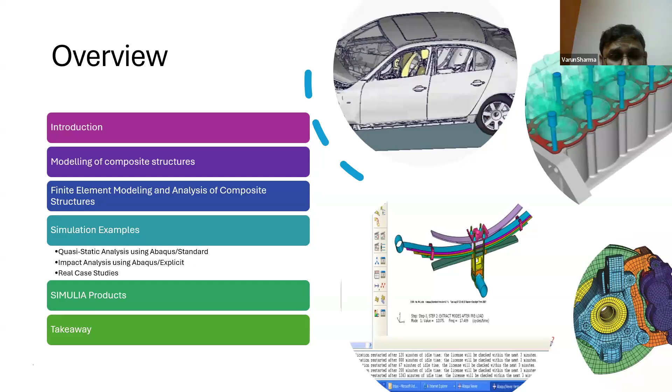So the agenda which I have created is a very unified and centric agenda. We'll talk a little bit about composites - maybe not in depth like Professor Debashish explained, but the fundamentals of composites - and then we'll progress to finite element modeling, and then talk about some examples. Finally, in the last slides, we'll talk about the products, because I know there will be a lot of questions about competency, and you can take some positive aspects from the slides.

So, first of all, as most of the members already know about composite material, let me try to explain in a very simple, short way. Composite is basically an essential kind of material nowadays, and it is a combination of two or more distinct materials that work together to provide properties that a single material cannot achieve on its own.

So if I talk about the basic level, every composite basically has two components: one is the matrix and another is the reinforcement. The matrix is the primary continuous phase which holds together the molecules, and it also transfers the loads between the components, and protects your structures from environmental damages.

And if we talk about the reinforcement, which is the other main component and is embedded inside the matrix - if you ask me what is the main purpose of reinforcement, I can tell you it provides the strength and stiffness. How you design your reinforcement and tailor your mechanical behavior depends on the reinforcements.

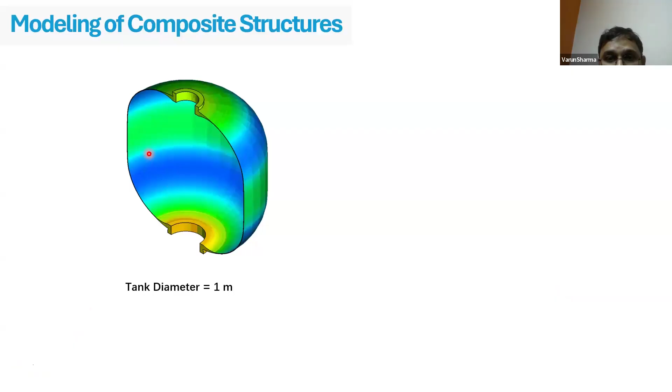So the first picture in this slide is about the scale - how you can choose the geometry at a different scale. We have a tank which has a diameter of 1 meter, a very large composite tank. If you see, we are not concerned with the individual fiber in this particular diagram. Instead, we treat this material as a continuous structure, and it looks at a global response like deformation, stress distribution, or failure locations.

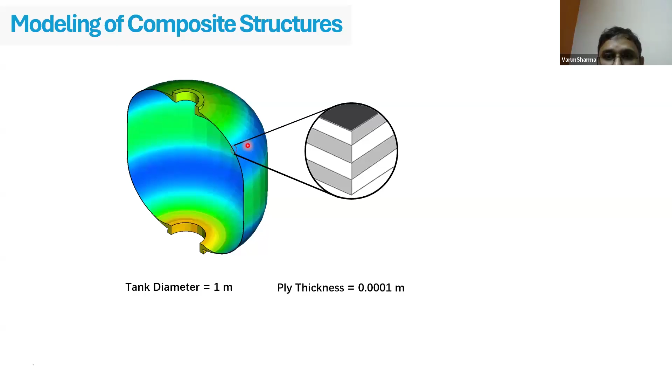So this is what we call macroscopic modeling. Let me choose the scale. Now if we zoom in one level, this is the second one. If I zoom in, you can see we have this ply level, and the laminate is represented as stacked layers, each with a specific orientation and thickness.

And the ply thickness shown here is very small compared to the full structure. At this scale, we can start to capture how different layers are interacting and how stresses transfer between them. This scale is often called mixed scale or mesoscale modeling.

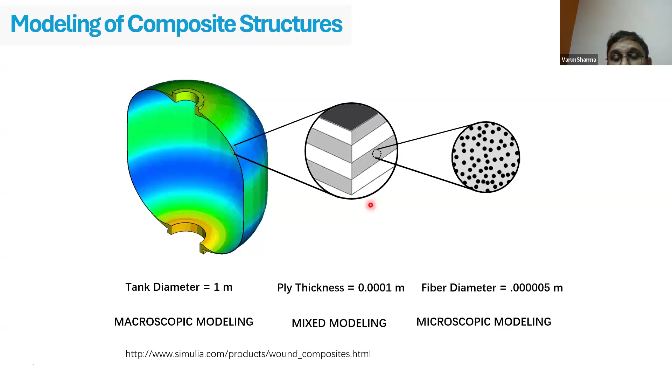So the key message from this particular slide is that composite analysis is multi-scale. If you wanted to understand the full orientation, you can feel free to choose the scale. Now let me explain elaboratively how you can choose it and which scale can help you.

So let's say we have these three techniques - now it is clear: micro, macro, and mixed. If you talk about the micro scale, as you can see, I try to put only the concrete words. In micro scale, we have the matrix and the reinforcements which are modeled separately, as deformable materials, and we explicitly represent fiber and matrix geometry.

Now, this is a very accurate study if you wanted to conduct crack initiation, debonding, as well as fiber breakage analysis. It can be computationally expensive considering the nodes, elements, and all those things. But this is the best way where you can understand the full structure in the form of small representative volume elements.

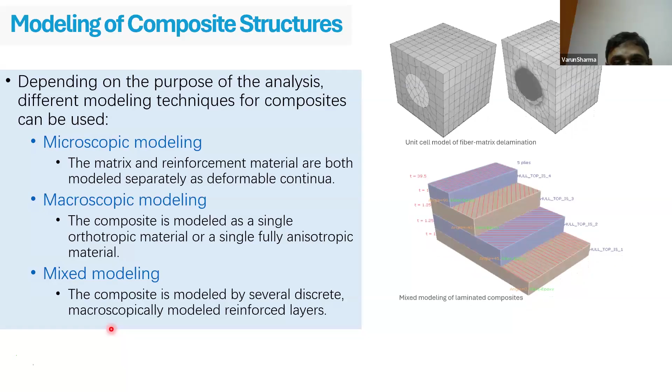This approach balances accuracy and can also help predict interlaminar stresses. On my right hand side, I've created some 3D models in ABAQUS package. We have this unit cell created with a very simple approach, and this is a mixed modeling approach where you can define different orientations and reinforced layers.

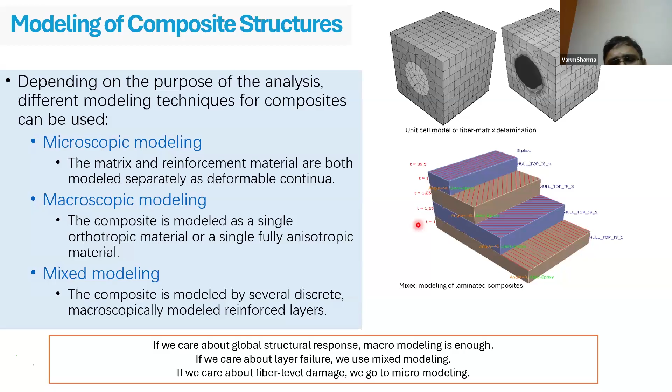The overall choice of modeling depends on your objective, your accuracy needs, and your computational resources. If you care about the structural response globally, macro modeling is sufficient. If you just care about layer failures, you can use mixed modeling. And if you care about fiber level damage, you can go to micro modeling. These are some of the ifs and buts we always prefer while performing simulation in ABAQUS.

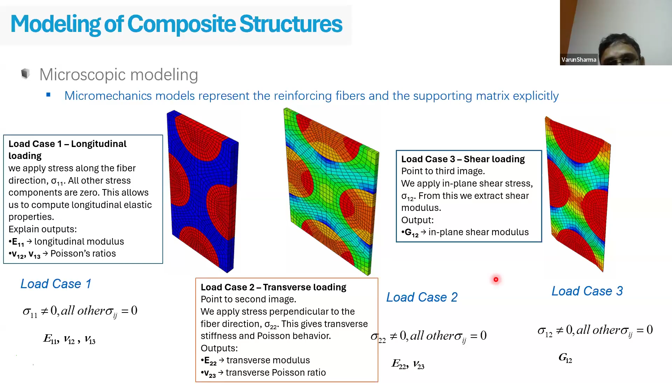Sometimes we imagine or have a longer vision to make something bigger. Of course you can do that, but in the back of the mind we also have to stick with the basics, because considering or projecting bigger achievements sometimes causes us to neglect the basics. So always stick with the basics, which help us execute the bigger task. So that was the basics, the fundamentals.

Now I would like to present some practical case studies we've done for customers. In ABAQUS, we have a very simple, specialized, sophisticated module. You can simply follow that module step by step and complete your composite modeling. This is the chronological order, as you can see from my screen. From part till load, we have the pre-processing module, job is your solver window, and visualization is your post-processing window.

First you create your geometry in ABAQUS, then you mesh it, then define the elastic or plastic properties, then assemble it, define the physics—whether static or dynamic—and interactions, and finally the loading conditions. You submit your job and visualize the results. That's the hierarchy.

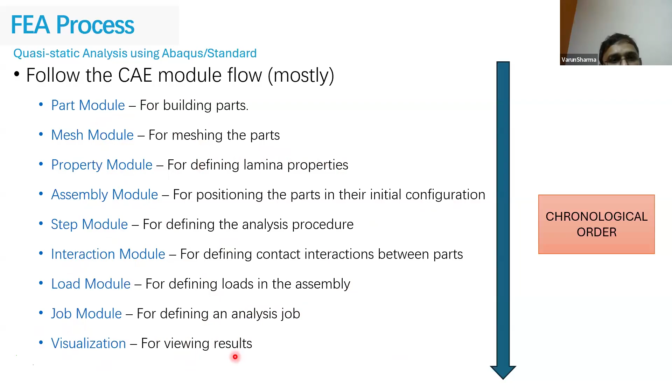So what we did, we created the geometry in CATIA. Of course you can do it in ABAQUS as well, but we prefer CATIA because it's from the same principal company, Dassault Systems. CATIA and ABAQUS both use the same kernel, so the background algorithms are easy to integrate with each other. We created the part here and imported it into ABAQUS as a step file, then built up the layup using CAE and composite modeler.

It's a specialized plugin available in the ABAQUS environment. Once we completed the import and export, we defined the properties and did the meshing. This picture reflects the contour stresses—blue, green, yellow. Blue reflects less stress concentration, whereas red represents high stress. The plus sign reflects tension and minus reflects compression. That's how the color differentiates the stress values.

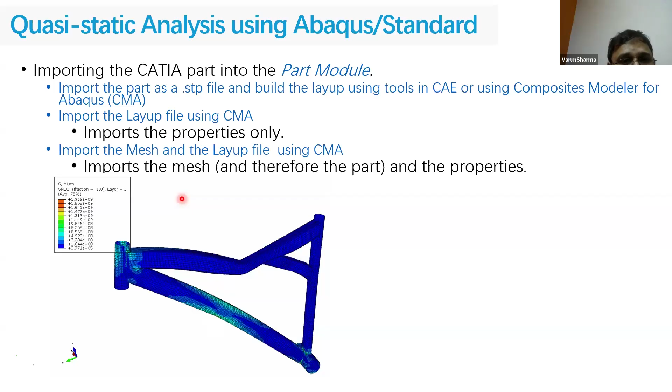So now, if you ask me how I have considered the problems, what exactly this is. This is just the frame, resolved under quasi-static analysis using the ABAQUS standard algorithm, and we define certain boundary conditions here. This is the fixed part, and again this is the fixed part, and we are interacting this rigid surface with the composite frame.

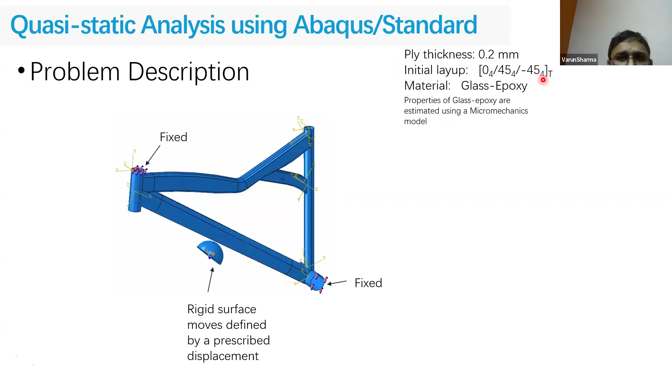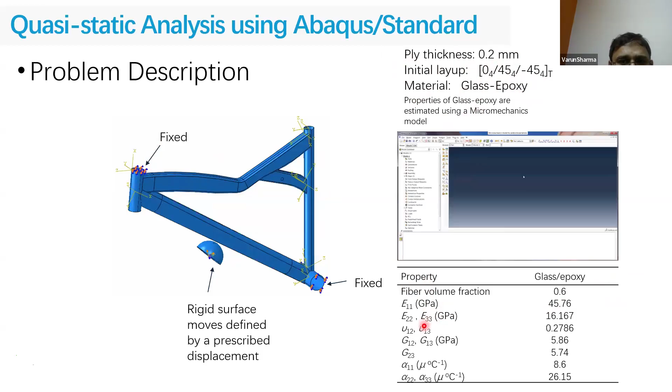We have used these properties: ply thickness 0.2, layup values, and material glass epoxy. So these are the elastic properties for glass and epoxy, which I have taken from certain research papers.

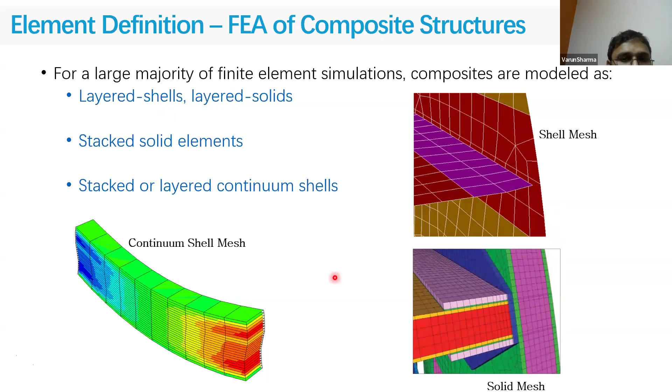Talking about the elements, what element definitions we can define. We have a list of categories: layered shell, solid, stack, and layer continuum shells. Considering the capabilities, you can choose solid and shell. We have also used 3D deformable continuum elements, so we have a list of libraries.

After we have done the analysis, these are the contour pictures, and on top you can see von Mises stresses, and this one is penetrating actually. So that was under quasi-static analysis, and beneath we have done the same analysis using dynamic impact using ABAQUS explicit.

So ABAQUS standard and explicit are two different solvers. Solver means which actually solves your partial differential equations, which calculates the stiffness matrix, which solves the large partial differential equations based on Lagrangian or Eulerian equations. So standard is more specifically designed for static kind of analysis.

And if you are into highly dynamic analysis, for example a car interacting with a wall, or something falling under the effect of gravity, those are highly dynamic explicit analyses. So here we are using certain wave propagation mechanisms, and in ABAQUS standard we don't use any mechanism. It's simply F equals KU, where F is your force, K is the stiffness matrix, and U is the displacement. That equation is also being used here, and depending upon your physics, you can choose the solvers. We have both this facility in ABAQUS.

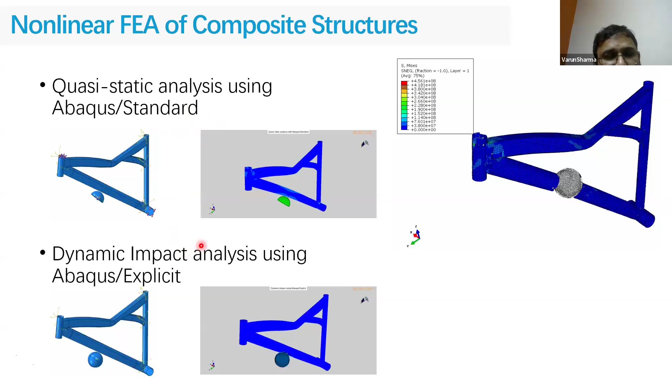Now that was basically a little bit about how you can model under static and dynamic conditions. Nowadays we also work more specifically on FRC. You might have heard this terminology very explicitly, and let me tell you, this is not an easy task to conduct. So we'll try to explain it in a very simplified manner if you are doing PhD, postdocs, or maybe R&D, so how you can simulate that kind of composites.

These slides try to capture all the information in a very confined way. Let's say you need to model FRC. How does this FRC work, and how progressively this kind of simulation fails? For example, let's say your composite is actually going to fail. Unlike metals, composites don't fail suddenly in one step, they basically fail progressively, step by step.

When they fail progressively, it means the damage starts small, in small increments, and then it grows layer by layer, and eventually leads to full failure. So that's how this mechanism works.

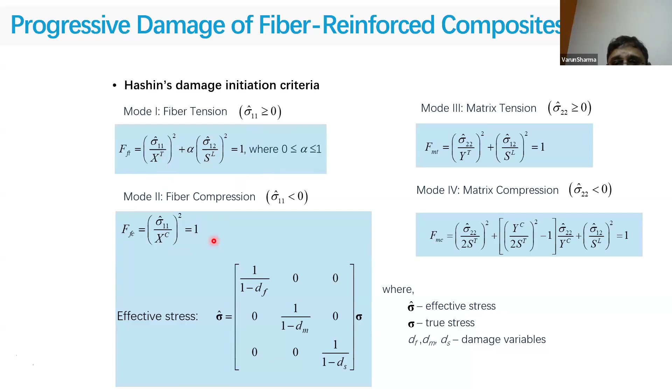It's just to give an idea how it works. So let me directly jump to this interface section. We have the edit material part. Here you can see you have to go to mechanical.

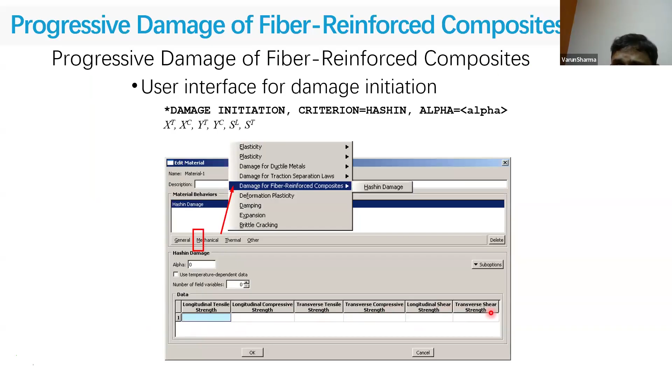You just click here and go to this damage for FRC, and select Hashin damage, and here you can define these values: longitudinal strength tension, compression, transverse tension, compression, and then longitudinal shear and transverse shear. So it's the same thing which we discussed here in FRC.

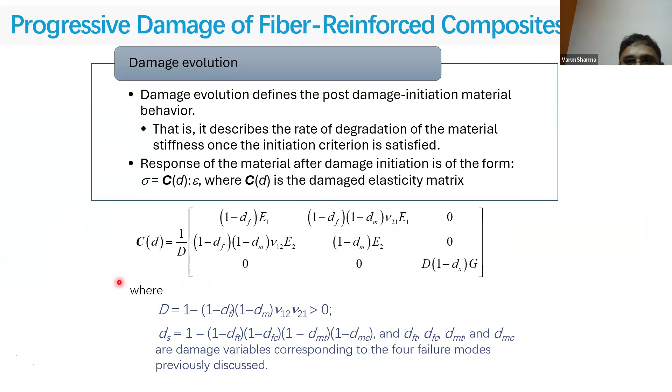Now for damage evolution, we are using these equations. These are all your damage variables corresponding to your failure modes for matrix tension and matrix fiber compression. So if you are planning to write your own codes, you can use these equations to help derive post damage-initiation material behavior.

So the second case, let's say if you wanted to introduce damage evolution, we have this functionality as well. You have to go to this particular part, select linear, and here again you will have four different parts, and you can derive the equations and apply the values here.

And we have very specialized keywords: DAMAGEFT, DAMAGEFC, similarly MT, MC, or SHR. So don't get confused, it's something very similar to your chemistry names, just to give you a quick idea.

So if you are doing keywords or scripting, you can also use these keywords within the ABAQUS environment. But just to tell you, these are very straightforward names, and you can feed the values here.

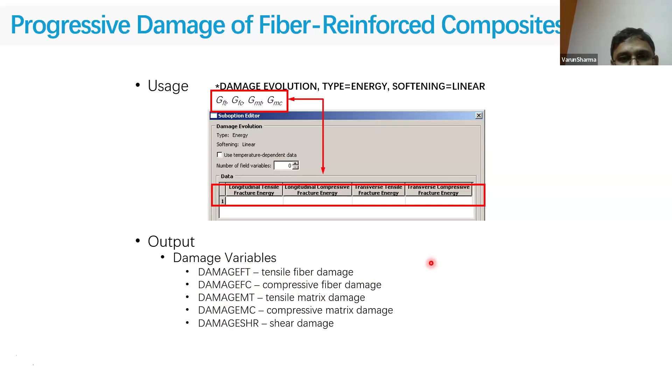Different solvers, how it works. If your target is only the maximum degradation in your composites, you can choose ABAQUS standard. It is actually removing the elements, but not eventually creating the failure.

But if you are using explicit, where you can assume a certain failure level, under the same theory, failure fiber modes, these are some of the conditions we use while performing the analysis.

Actually, these are keywords: section control, element deletion, yes or no, maximum degradation, DMAX. So these are the keywords which we are implementing while creating the finite element models.

And similarly, in your status file, which is your output file, we have two instructions, 1 and 0. 1 means some of the elements are active. If it is reflecting 0, it means it is completely removed.

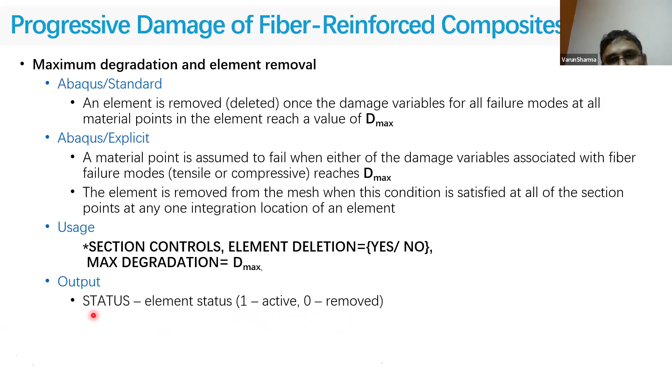So that's how we distinguish between the standard and the explicit solver. Now, based on our experience, we can tell you nowadays it's not that easy to simulate composites behavior. Generic analysis you can do, there is no problem, but nowadays the physics is getting more and more complex considering the new developments.

So experimental things cannot identify the elastic properties. So we need to find certain techniques such as virtual environments or AI or ML integration based softwares which can predict the behavior accurately.

So I can tell you we have this tool ABAQUS, which can help you to predict delaminations, material damage, failure, and it is being used extensively across the globe over a very large period of time because of its accuracy. This can not only help you to understand the properties, but also you can implement on a very large scale if you are a startup company or working in R&D sector. So a lot of things can be revealed using the ABAQUS tool.

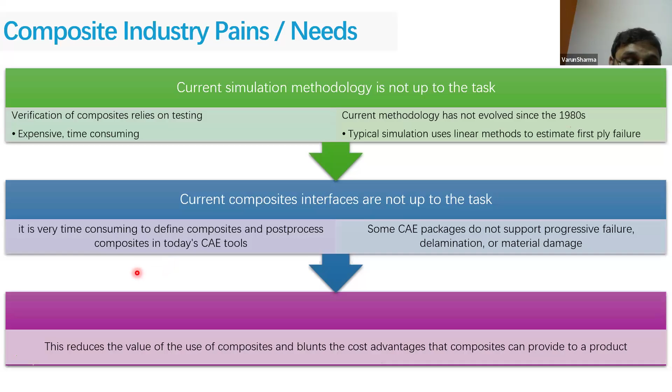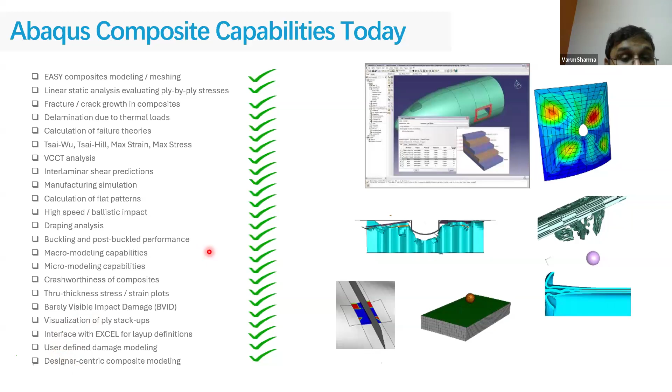Now I just wanted to highlight some of the portfolio extensions, because we have very large industries who are continuously developing the tool day in day out. So these are some of the tools you can see, like VCCT, or direct links to CATIA VPI, or composites crush. We also capture some of the industries, basically merging some of the small scale industries who have done a lot of work in the composites sector.

For example, WCM, it's a plugin developed by a French startup company. Now it is a part of ABAQUS. So we are always expanding our horizons in the composites sector, not just pre-processing, but always looking for something which we can include in the composites area. And for example, I would like to showcase some of the case studies here.

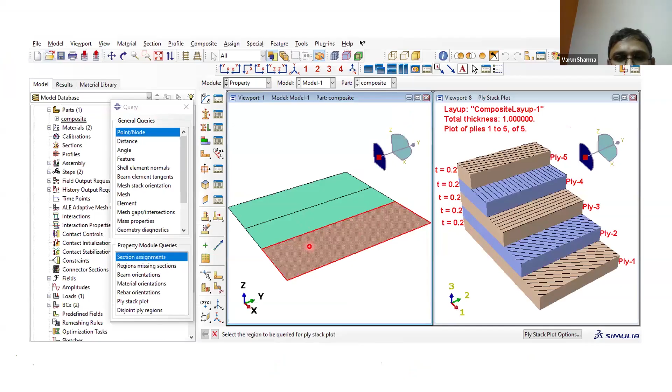So now if we see here, yeah, this one. So we have captured a lot of practical case studies here, which are purely for composites.

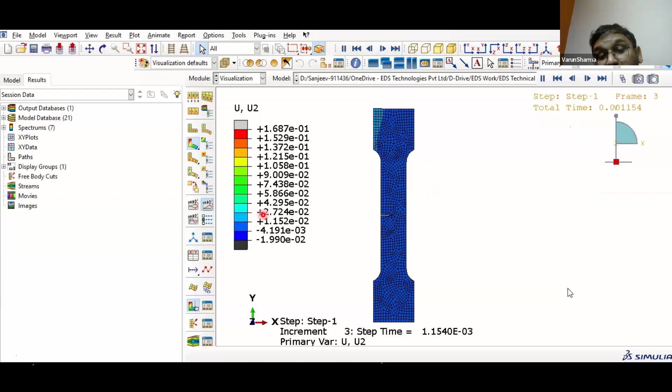So this is one of the case studies we have conducted under tension. Here you can see the displacements. U2 means displacement in the y direction.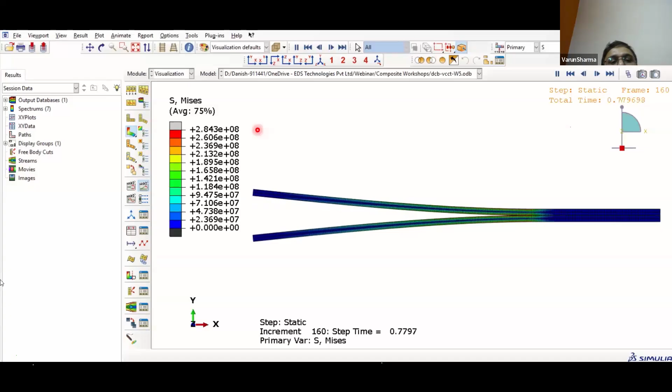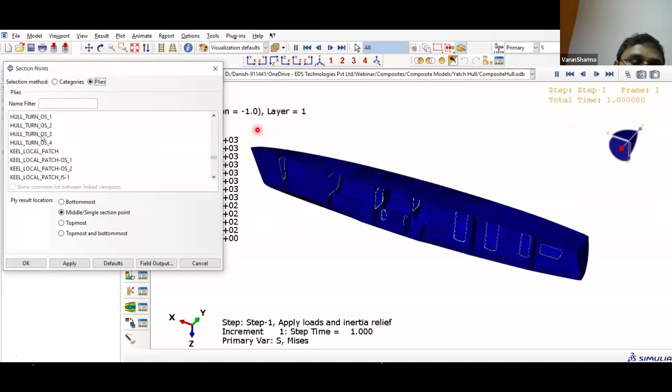This is another case study, VCCT, virtual crack closure technique. That was another example of yacht. And we have applied here loads and inertia. So we have incorporated various plies here, as you can see.

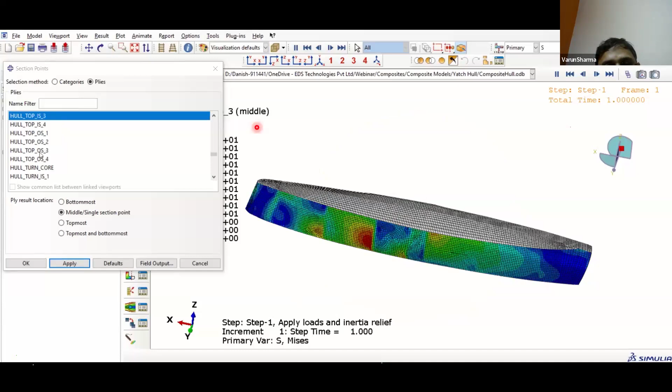Okay, so that's how you can see the specific stress value on individual plies.

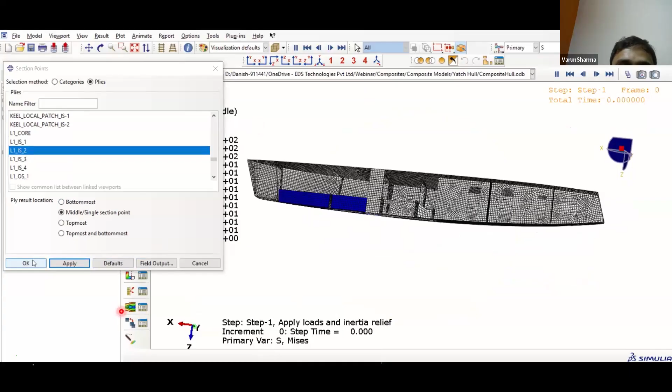And this one is the ball penetrating through the wall. We have used here the explicit solver because of the high velocity.

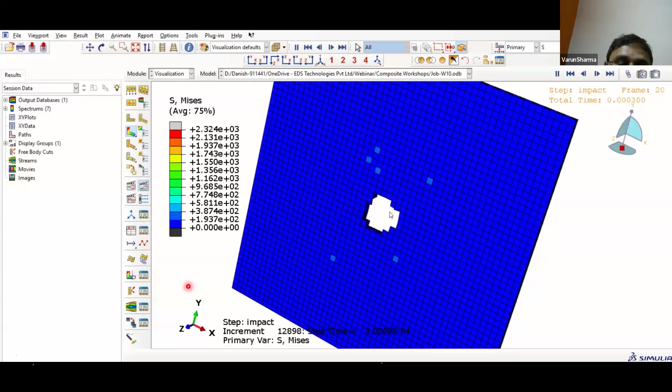The post processing part can simplify in many ways. So this was the direct pictures we have taken, animation videos. Again, this is a windmill example.

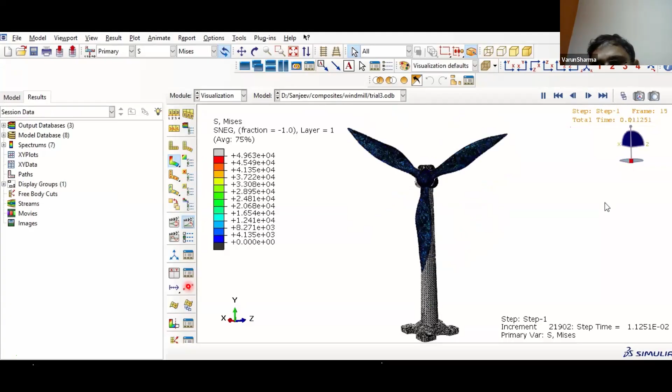The blades are made from composite material, and we can increase the speed as well. So we have more than 2000 customers, and we are supporting them day in and day out.

Again, this is a drone example. We have used here damage mechanics.

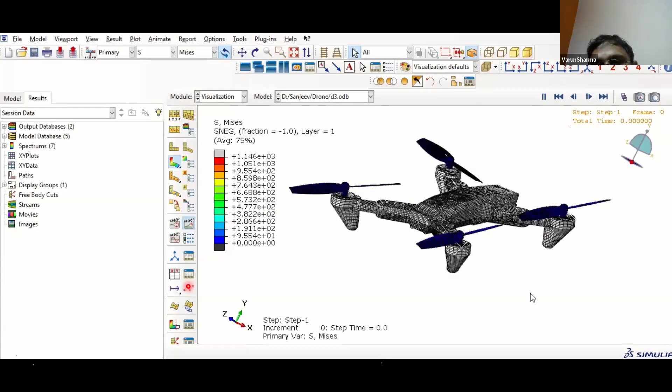Now I hope you get an idea, this is not just a solver, it does include a lot of capabilities. Now I want to talk a little bit about the suite, because this is the package portfolio we have used during the simulation. So you already might have heard of ABAQUS, which is for finite element analysis, but we also have Isight, Tosca, and fe-safe. Isight and Tosca are for parametric and non-parametric optimization, and fe-safe is purely for fatigue calculations.

So if you combine all these four software together, you can...

Hello sir, yes. Varun sir, is there any problem sir? Can you hear us? Sir, your video has stopped and you are not visible too. Your audio has stopped too. Can you connect with us?

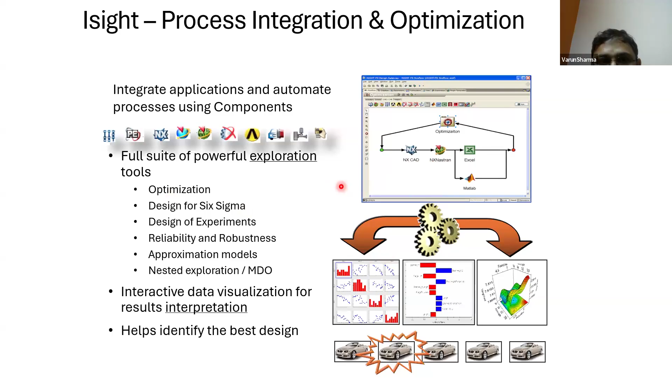For example, if you see here, we have created a complete list of applications which can be linked here. It works like drag and drop. It is not like where you have to create a 3D model - 3D parts you can do in ABAQUS, but here it is for linking the plugin. So just create your file, bring it here, and perform the experiments. This is a very industry adopted tool, so I would request you to just give it a try and you will see the benefits of it.

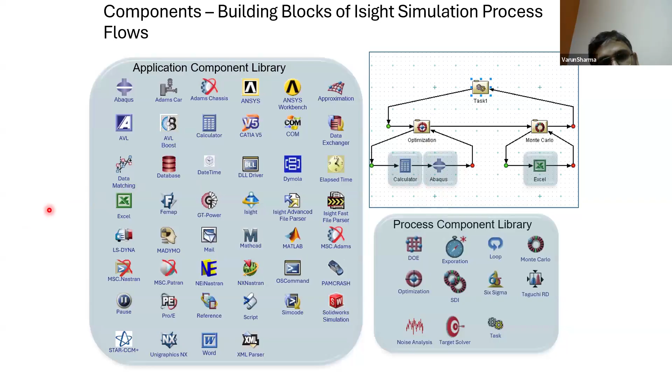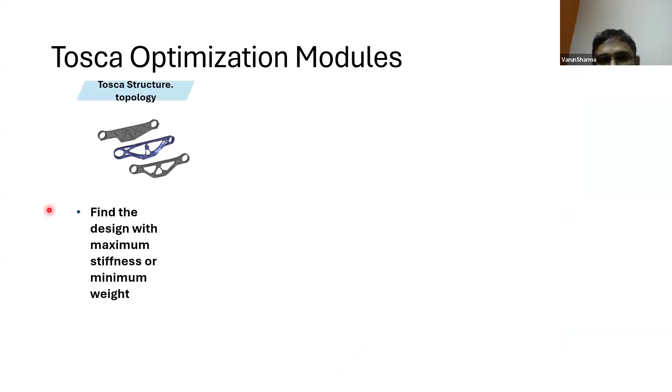Now the third module we have is non-parametric optimizations, TOSCA. TOSCA is primarily for volume reduction, sizing, shape - where you can play with the local stresses - and the last one is bead, to increase the stiffness. Some of the things we have also incorporated here are for fluid optimizations. I would not focus much here, but these four modules - topology, sizing, shape and bead - can be used for your composites. It is very straightforward and works on a very direct principle where you need to define the variables, objective function, and constraint - very simple and practical application oriented tool.

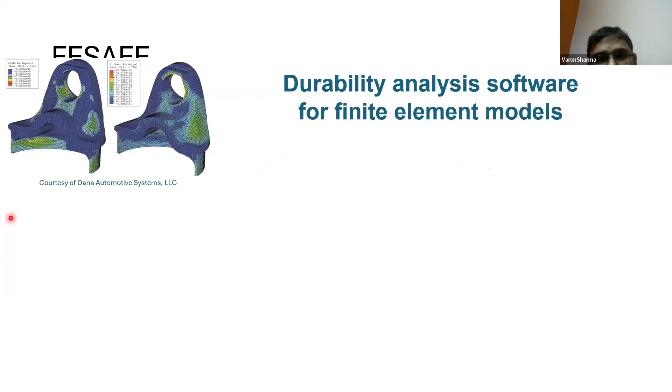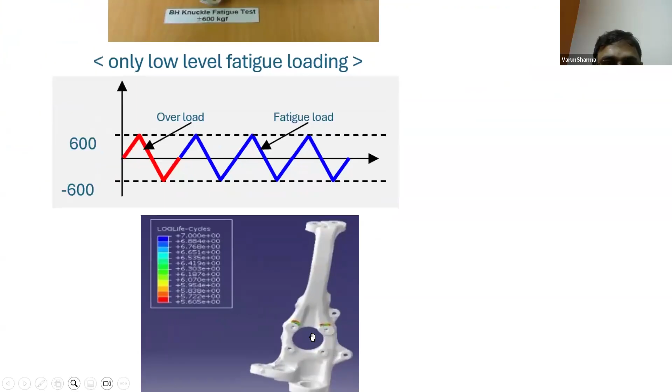This is a practical example you can see - experimentally it is getting a break from here, and if you ask me about the simulation results, again it is reflecting here. Let me zoom in - you can see the red spot, so exactly it is giving you the hotspot part. If I choose a different scale, high level loading, again it is reflecting here, and if I combine both loadings, high as well as low, it is reflecting the fatigue here, exactly the same as reflected here. That's the capability of this tool, and it is very accurate - here you can identify the hotspot area.

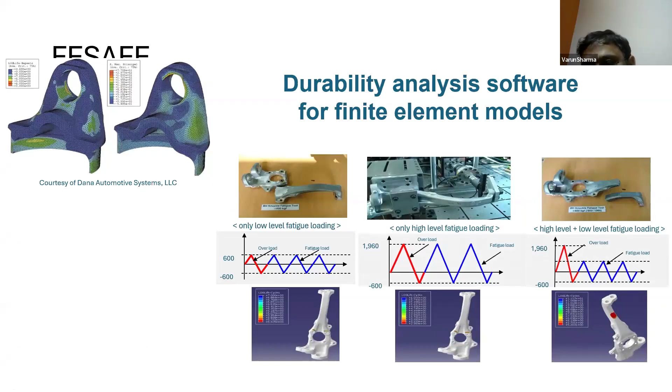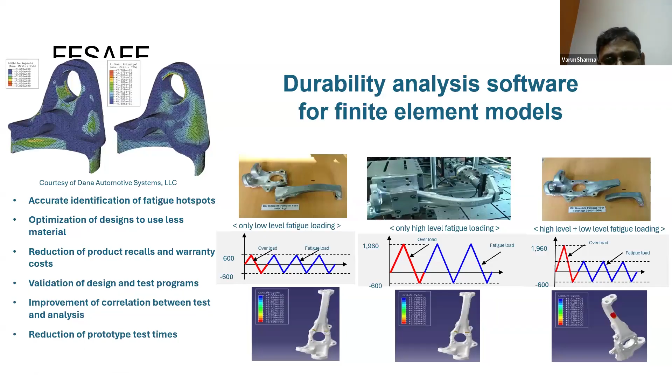We call it a hotspot, and this hotspot helps you understand the local stresses so you can optimize your design, reduce the product recall and warranty cost, validate your design, and correlate your test and analysis.

A lot of these prototypes can be conducted in ABAQUS, fatigue analysis, and FE-SAFE. Those are the four tools we have used here. Don't just think about one industry perspective, you can apply this in any area, whether consumer sectors, aerospace, life sciences, automotive, or energy sectors. We have a list of analysis we've conducted for our customers every year.

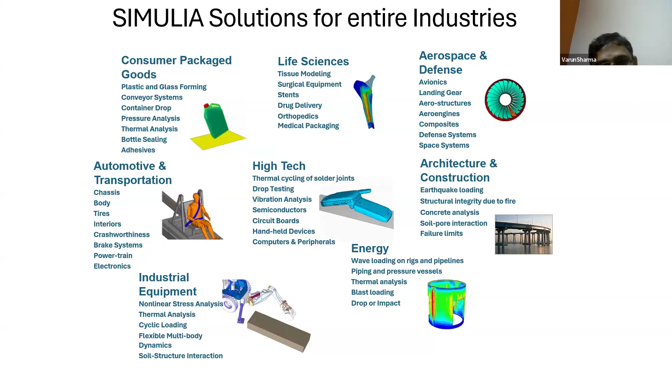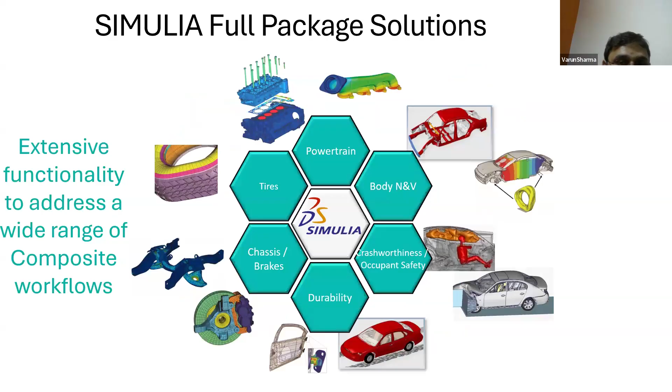This list on my screen is presently for last year, 2025. We will create a similar slide for 2026, so you can see the list of analyses we have done for our customers. These are some of the areas if you talk about the full package. Now I also wanted to showcase some of the development I have done over my career.

I've been in this industry for the last 8-9 years, so I have developed some specialized tools specifically for composites. The first tool is for porosity analysis, and the second one is for internal shape generation. I have used AI/ML based algorithms here, and the same in IntruNIX as well.

Poroflex can help you generate 450 plus porosity shapes, porous shapes, and IntruNIX can generate more than 1200 shapes. Both softwares are copyrighted under my name, and we have released the first version, with the second version coming very soon. We are working on it.

Both tools are capable of creating input files for simulations, and this input file can be used in any commercially available software, whether ABAQUS or any other tool. It can solve the equations, but the most critical part is done by Poroflex as well as IntruNIX.

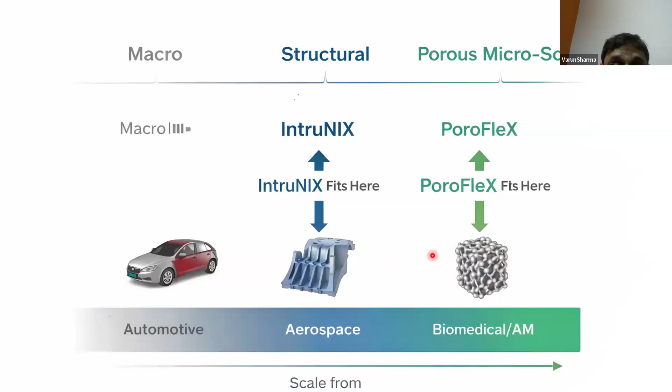Overall, if you ask me what it can do, nowadays most composite engineers, drone engineers, or R&D engineers working in composites struggle to design such complex shapes, interlayers, reinforcements, fibers, or plies, with different geometrical orientations or topological deviations.

These kinds of shapes can be done using these tools, so you can see on my screen, I have created these small geometrical features. And obviously these shapes can be exported in any of the formats.

We can eventually apply the complete properties, thermal, mechanical, electrical, or physical properties here, and those properties are stored in the INP file. These files you can use directly in FEA solvers, and it's a very interactive GUI where you don't have to struggle a lot. You just apply certain geometrical parameters, and you will be able to see the 3D model.

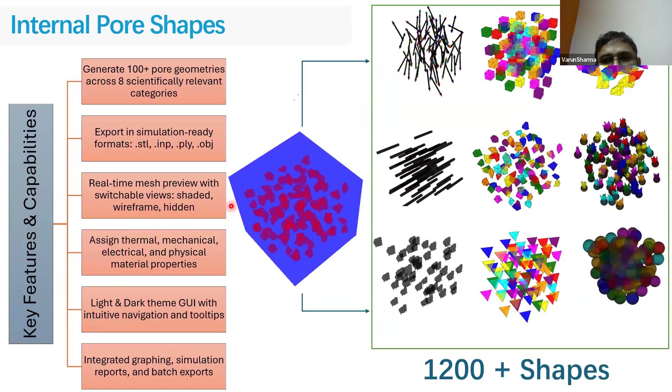Now I would like to take this opportunity to conclude. Since we are from the industry side, I tried to create a mixture of applications as well as concepts. Overall, the tool that we are using on a daily basis is one of the best tools in the market.

We are here to support all academia and industrial people. We provide global computational support to our clients, supporting all the IITs, NITs, DRDO, central universities, for their R&D, specifically for institution-level, theme-based guidance. We also have a specialized team of experts who are into this domain, and based on the area of interest, we can create specialized plugins based on mutual agreements.

We are a 30-year-old company, and our principal company's systems have been in the market for a very long time. We have very strong, long collaborations with industry, academia, and research. We understand composite materials are one of the nurturing areas, and we want to give our best shot in this domain.

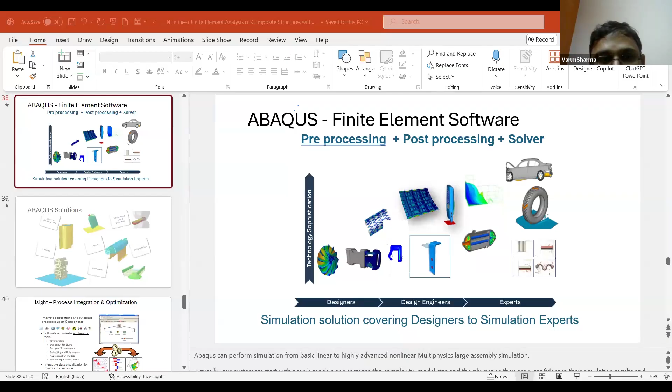Akash Gupta has written, which tool is it for fatigue analysis? I'm going from bottom to top. So for fatigue analysis, I am using ABAQUS, sorry, FE-Safe.

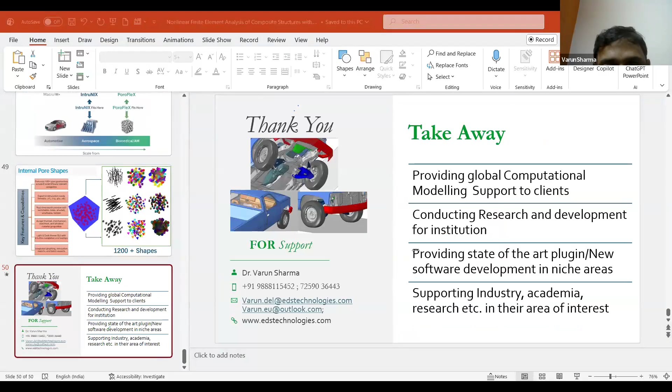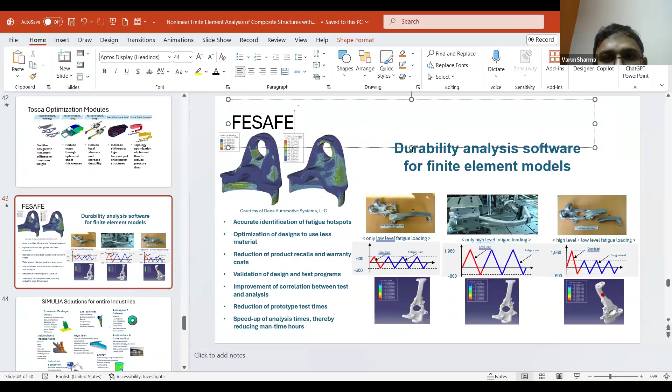So the next question is, which tool can be used for torsion testing? My pronunciation may be wrong because I'm not from mechanical. No issue, I can understand. Torsional testing, which tool, right? You can use ABAQUS. It's a good tool for torsional testing.

Next is Mr. Amit Pal Singh. He has asked, what is the difference between Tosca and topology optimization? So Tosca is basically the name of the tool, and topology is for volume reduction.

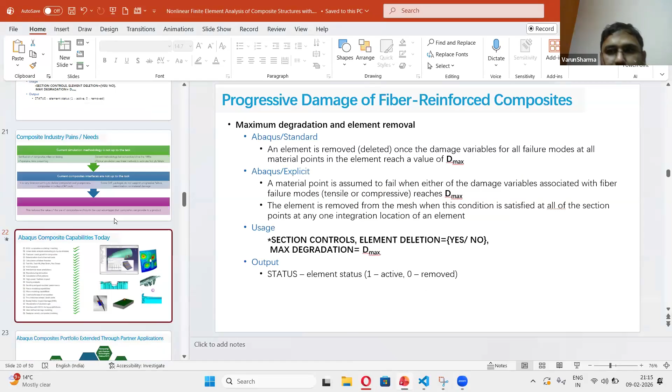I think I'm not able to satisfy everyone with this, but we are open for discussion again, I am sharing my contact information again.

Mr. Satya Prasad has been repeating the question, he urgently needs the answer, I guess. His question: how can you give input in a simulation tool for new composite material? See, it's a very...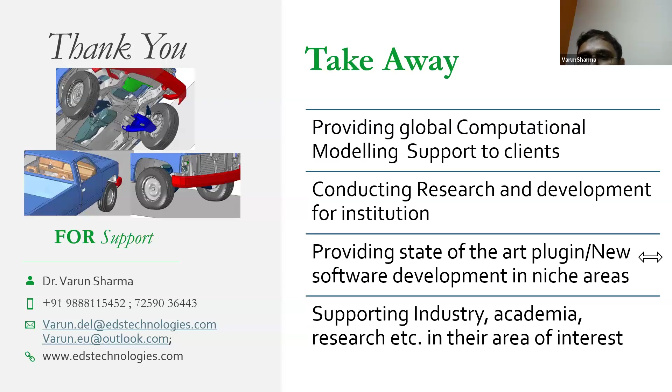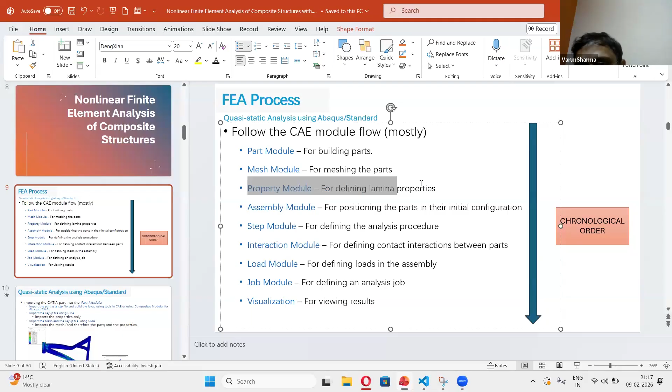Okay, so if you go to this one, slide number 9 - this is the basic hierarchy we are following in performing the simulation of composites. So first you have to create the part, okay. Second, you have meshing, and then you have property. In property, you have to go to the elastic section here - which one is this one?

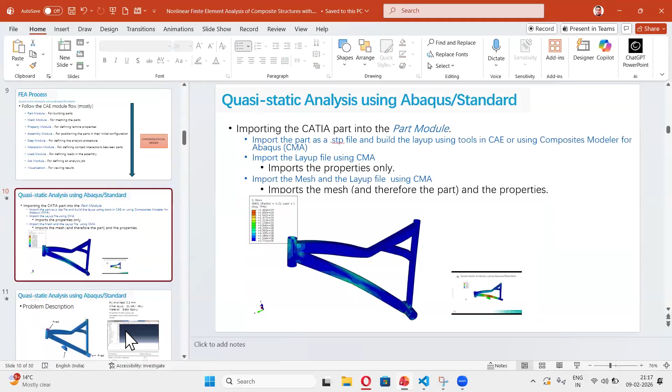Yeah, here we have. There must be certain geometrical... yeah, this one. So in the material section, you have to go to general, where you can define the density, and then you have to go to this mechanical part. Here you can choose elastic properties if you are only defining Young's modulus and Poisson ratio. If you want to understand the damage, then you have to go to damage for fiber-reinforced composites. So it is very straightforward. Create the geometry, go to material, and define here. That's how this hierarchy basically works. I'm sure ANSYS does the same thing.

I don't know which tool you are using, but in ABAQUS we are following this process for giving input in the simulation tool. I hope I answered your question. Also, if you are struggling to find it, you can look at some videos on YouTube. There are plenty of videos.

Reinforcement, good composite material, what do you suggest? Fly ash with aluminum as a reinforcement. If you are asking me about a computational model, of course you can design fly ash in aluminum or as a reinforcement. That is possible. But if you are asking me... it is not straightforward to design it.

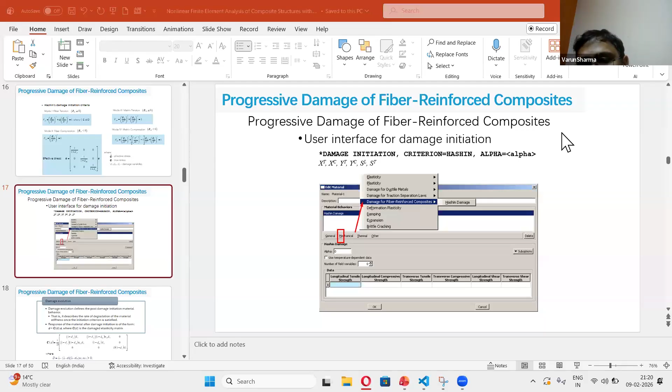Reinforcement is possible. So for example, I was reflecting this picture, something like that, something like that. So you can also create fly ash in this form, and it will act as an aluminum reinforcement.

So these are R&D topics. You have to have a certain level of brainstorming. Okay, just fix some appointment, we can sit together and discuss. Any more questions?

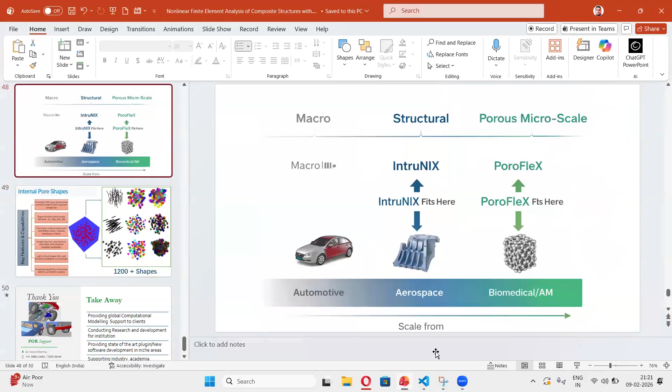Borun, I think there is no questions. So I have a question there, if there is any. Okay, particulate composite, so in that case how do you model that? If we have a particulate composite, how can we model it? So are you creating the 3D model in ABAQUS, or are you creating it in another software?

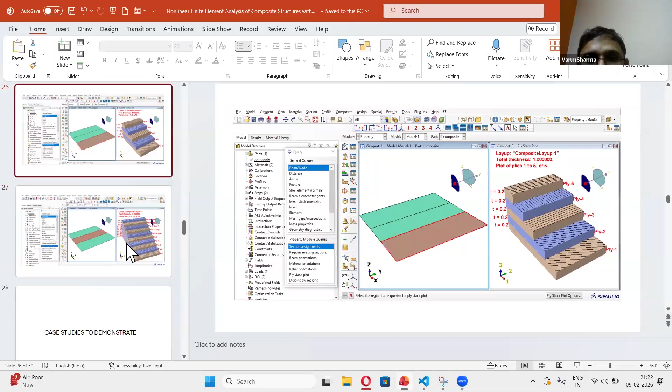Suppose we are mixing some powder with an aluminum matrix. So in that case it will be aluminum composite, but it is a particulate composite. So how to model that? So the reinforcement will be your powder, right? Yes. Okay, so in that case, ABAQUS cannot create that model. It is not possible. ABAQUS can solve those powder and matrix interactions, that is possible. But to create the 3D model, you have to have a certain third-level or third-party software.

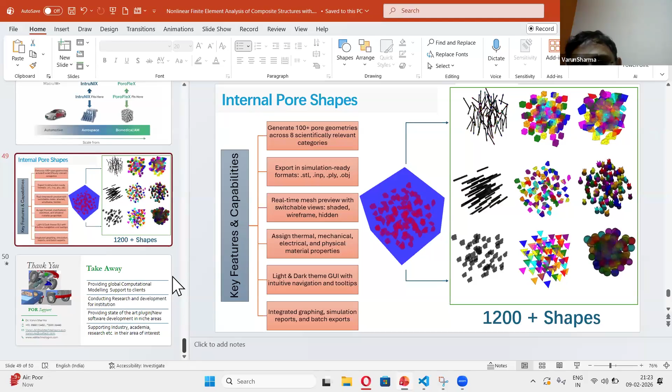I'm not saying this tool is the best. For example, the blue one is your matrix, and the red one is your reinforcement, which is your aluminum powder. So you can create the shape of the powder and the matrix in IntruNIX, and create the file, the inp file, and that file you can take to ABAQUS and just apply the properties or loading conditions, and you can simply submit. That's the easiest and quickest method.

But if you have a very simple geometry, something like different plies in rectangular forms, then you can use ABAQUS for creating and for solving. But if you have a complex geometry like nowadays, interlayer laminations, then you need third party software which can help you design those things.

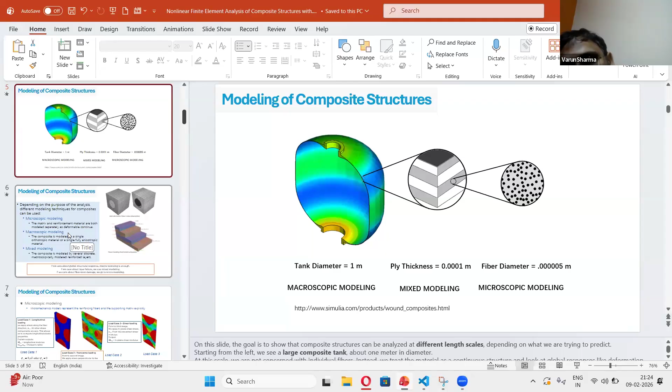I remember when I was doing my PhD, there was a software called Woven Fabrics. It was able to perform textile-related composites. And if you are into aircraft engineering, there was another plugin for that. Because composite materials have different kinds of physics, and every scale reflects different engineering. So maybe not now, or maybe the other way around, you need a certain level of either coding or third-party software which can help you design it.

One tool obviously cannot suffice to solve your problem, so try to have something extra. I mean, it's not like marketing the software or trying to make your life easy, but that's how this composite industry gives you flexibility.

If you want, I can help you with this aluminum powder reinforcement engineering. Because we have to use the unit cell model, we've got various papers, they are basically designed with the help of the unit cell model, but the unit cell model will not give the whole matrix property, it will give the particular region property. Yes, yes, yes, okay, okay, it's possible.

Some participants are asking about nanofiber, nanocomposites. There is a special session regarding nanocomposites at session number 12. You will get every information at that session.

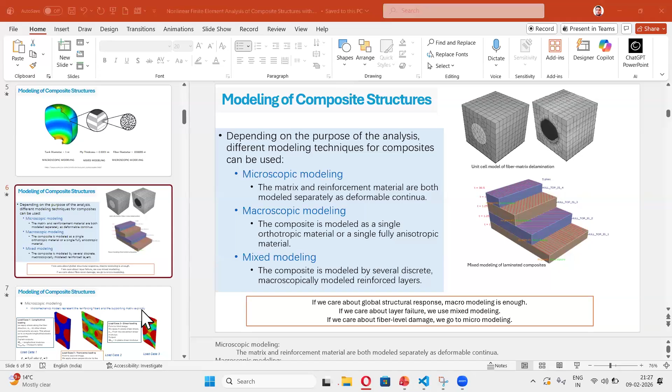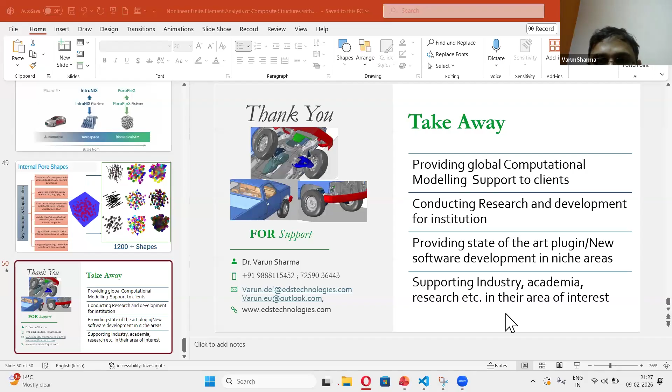I actually try to answer, but in case there's something you feel to discuss, please have my contact information. Hello, Dr. Varun sir. Yes sir, actually this is Dr. Arun Karthikeyan from CBM University, Gujarat, sir.

Actually, it was a beautiful presentation in all aspects. I think you spent a lot of time to prepare these PPTs. Yeah, so thank you for your inputs for encouraging us. Thank you so much, sir. Thank you very much, sir.

Actually, sir, I'm working on metal matrix composites. Aluminum is the base material, along with silicon carbide and zirconium oxide particulates, which I use to reinforce the aluminum matrix. Experimentation-wise, I have completed all the analysis, but I want to improvise and extend the work to some more aspects. So I am planning to make a simulation.

Is it possible to model the aluminum matrix and ceramic reinforcements as two different materials? If you have knowledge on this, please share it with us, sir. It will be helpful for us.

See, it is possible for matrix reinforcement. There are a lot of industrial customers doing it. Maybe you can drop us an email, and I can share practical case studies with you. Okay sir, just drop us, I will share it.